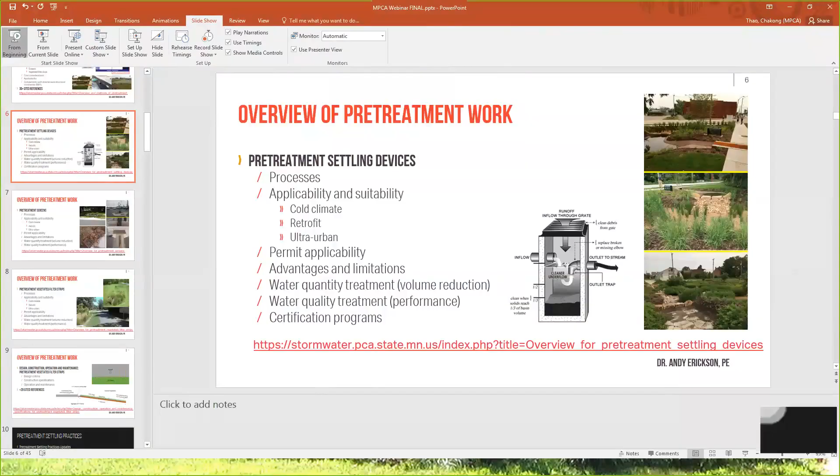Thanks for having us here, and thanks to everyone for attending our webinar today. I'm Katie Thompson, the project manager. I've been working on the pretreatment case studies and pretreatment sizing with Dr. Gulliver. We also have Dr. Scott Struck here from Geosyntec, who will be presenting on pretreatment selection practices and the BMP selection tool they developed. Dr. John Gulliver will be doing the pretreatment sizing, and Dr. Andy Erickson will be discussing filter strips and the Stormwater Manual update we've been working on prior to this most recent update. With that, I'll turn it over to Andy real quick.

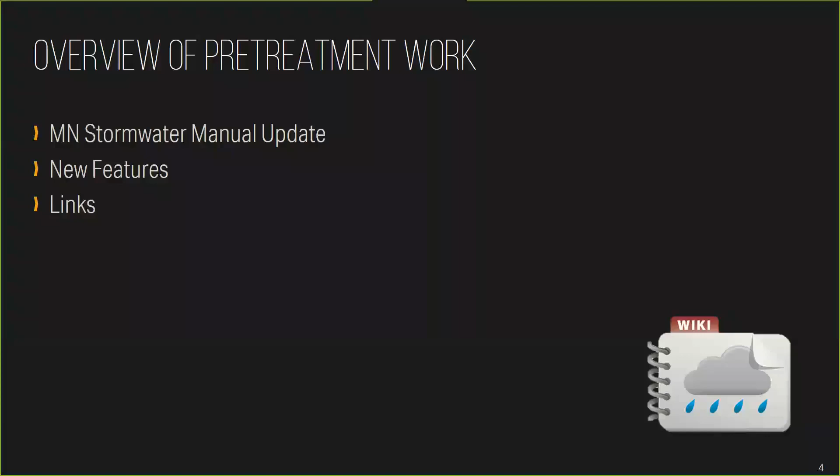Very good, good morning everyone. My name is Andy Erickson. I'm glad to be here with you today to talk about some of the work that we did previously on pretreatment.

Part of that work is we wanted to develop an overview of pretreatment, which covered not only the importance of pretreatment, but the different methods and practices, which fall into three categories: settling devices, screens, and vegetated filter strips. We developed information from over 30 references on cost considerations, applicability of these devices, and compatibility with downstream structural stormwater BMPs.

If we need more capture of sediment, we need to get into a structural stormwater BMP or even potentially advanced treatment.

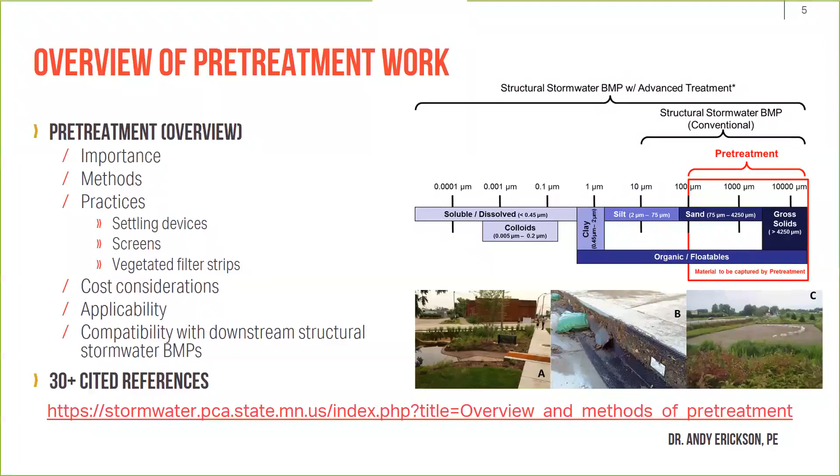We did go into some detail on the individual categories as part of that work. Settling devices, we really presented information on a lot of different categories: processes, what's happening in these practices, applicability and suitability in cold climates, retrofit conditions and ultra-urban situations. Also, there are links there to other parts of the manual related to permits and applicability.

We discussed advantages, limitations, water quantity treatment, which is really volume reduction. For these settling devices, typically we don't have volume reduction, but we do have water quality treatment in terms of performance for removing sediments and other pollutants. For settling devices specifically, we also have a section on certification programs, because there are certification programs and systems across the country, so we wanted to present that so people were aware and could look for those if interested.

Again, on the right side of all of these slides, I have some pictures and images from these individual sections. You'll also find at the end of each of these slides links to the individual pages on the Stormwater Manual where you can find all of this information. And these slides will be provided on the manual after this.

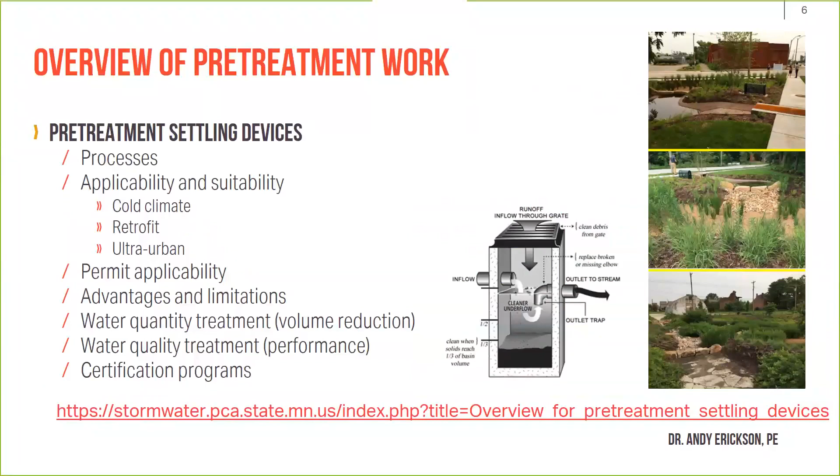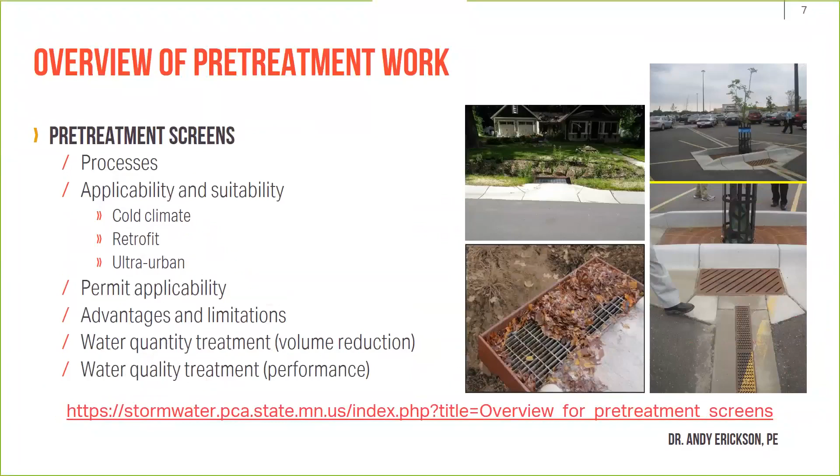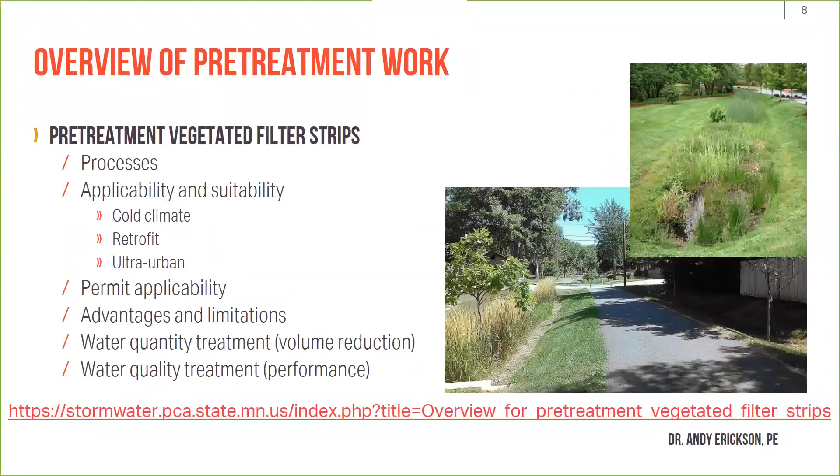And finally, vegetated filter strips with some images and a link here. Again, the same categories, although for vegetated filter strips as part of that work order, we did dive a bit deeper, and we pulled up some more references, over 20 more references to talk about specifically design, construction, operation and maintenance of these vegetated filter strips specifically for pretreatment.

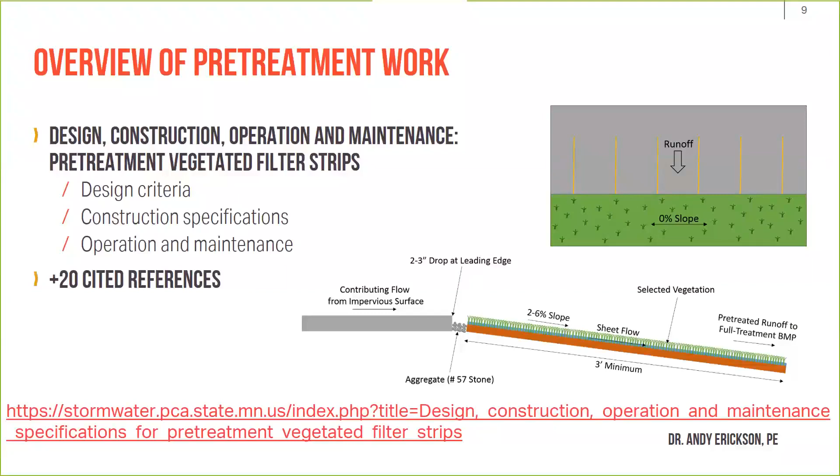All right, so this is Scott Struck with... did you, do you want it? Don't listen. Okay, this is Scott Struck with Geosyntec.

I'm going to follow up with Andy's discussion and talk about the pretreatment settling practices and the pretreatment selection tool, and then even do a quick demonstration of that.

As Forrest had mentioned, pretreatment is a requirement of the construction general permit, so it's covered under that permit and is a requirement of that. We're talking about a little bit more on the stormwater side, in that Forrest had mentioned how it was more of a descriptive type of standard that must be met, and I think that's good in that it allows some flexibility right now.

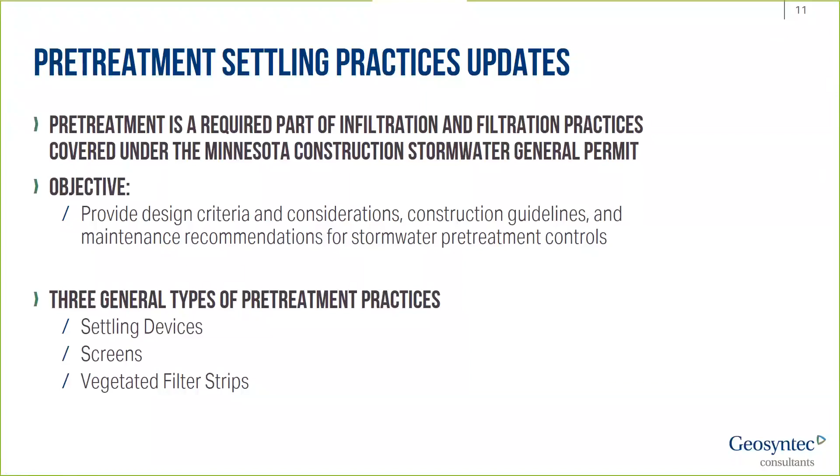But overall, as Mike had said before, our objective here is to provide some guidance. Andy just went over some of that information on the design criteria and considerations, construction guidance, and maintenance recommendations for these different pretreatment controls. Andy already hit on this, the three different types of general practices are settling devices, screens, and vegetated filter strips. We've taken that and gone into a bit more analysis of the functional processes of these.

We've ordered these in the pretreatment section under different processes, which include hydrodynamic separation devices or swirly devices as they're referred to, screening and straining devices, above ground and below ground storage and settling systems, filtration practices, and then a few that don't fit those typical descriptions, which we've put under other water quality devices, kind of a catch-all.

The organization of that part provides each of the different types of pretreatment practices in those categories, and each section provides a pretreatment overview, process summary, pollutant removal, system design and sizing information, installation recommendations, inspection, and operation and maintenance. That's all coming from the information Andy was describing in the manual, and we've brought that same information in for pretreatment.

The other side of that, mentioned a few times, is that a number of the devices are proprietary or manufactured, so we have numerous references back to those manufacturers' websites or some of the assessment websites Andy referred to, the national certification programs. There's a number of references that go back to that type of information, because it's very useful both in the siting and the design and expectations for performance.

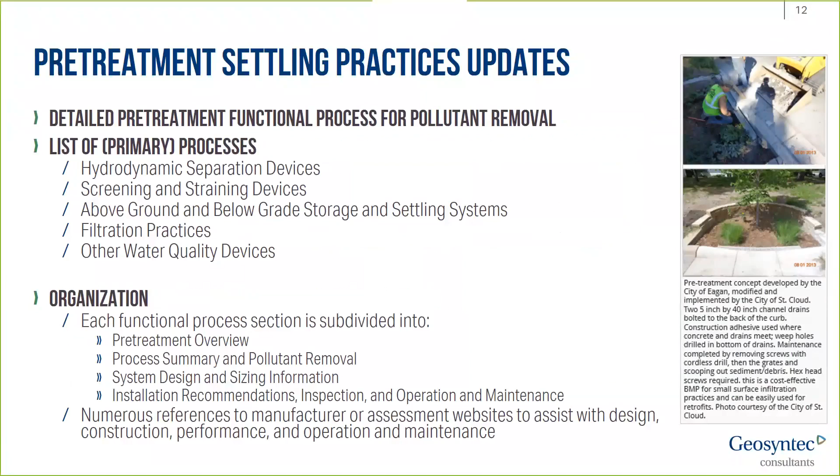This is a screenshot of what the pretreatment page looks like. This is a section from the hydrodynamic separation devices page. I pulled this one up mostly because it has some of the information already referenced, including reference to the link out to SHSAM, and the link to, for instance, the New Jersey Department of Environmental Protection, which provides one of the certification programs.

So you'll see there's a lot of this information directly hyperlinked within the text, so the information is really at your fingertips. I'm going to follow through the hydrodynamic separation devices as an example of the type of information, and then demonstrate that it's really there for all of these categories.

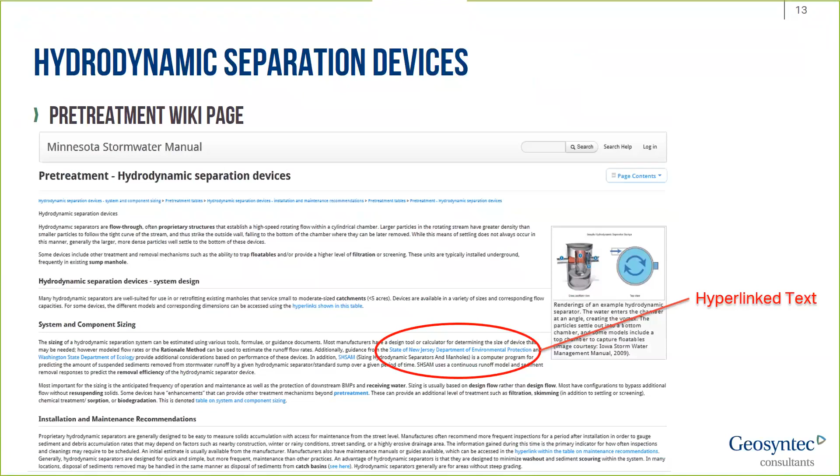Again, you see the quick information in terms of an introduction, system and component sizing, installation and maintenance recommendations, and then some O&M that connects to a number of different tables. This is an example of one of the tables it connects to.

This is specifically the information on just the description, the general descriptions of the different types of devices. This covers, for instance, the treatment mechanisms and general pollutants removed.

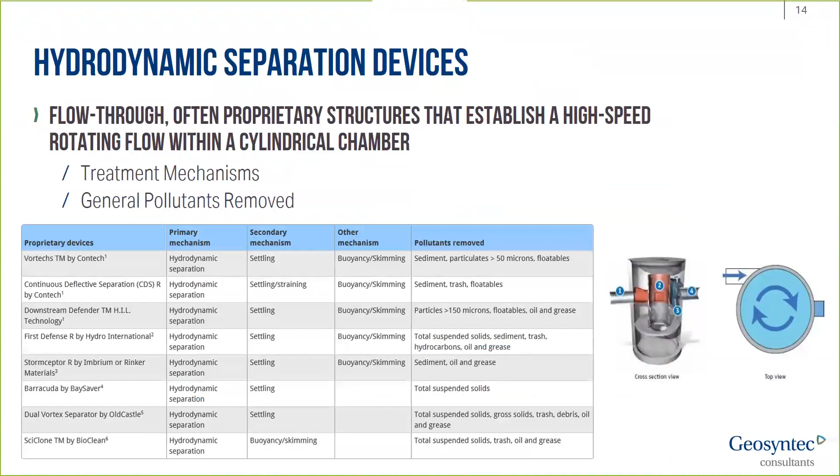The next section includes information on the system sizing and design information, and we've included information like the typical land use where it's applied, compatible downstream practice, some of the sizing calculations—especially on the hydrodynamic separators, this is where it often refers out to the manufacturer's sizing tables—as well as other aspects of the design that are important. For instance, inlets and outlets tend to be a real important factor on these, and whether they're designed or constructed properly, and then flow diversion structures.

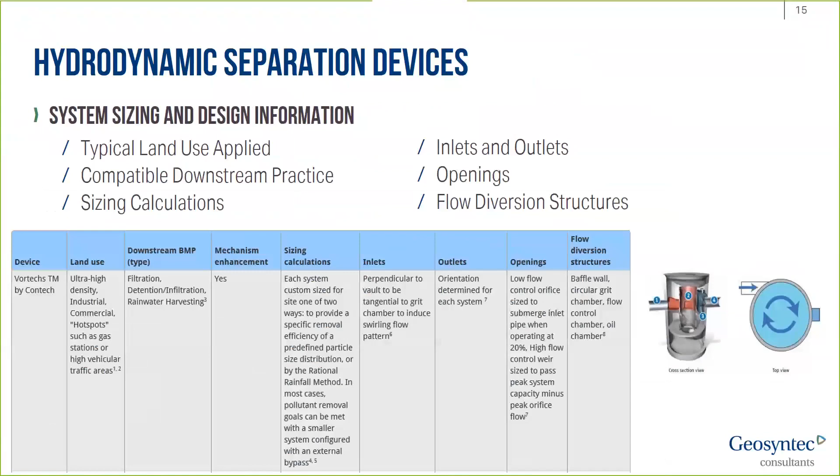Continuing on with the type of information in there: the installation recommendations, inspection, and operation and maintenance. We have a table that includes that type of information, including inspection frequency, the typical kind of maintenance that's needed, whether there's different public or private considerations, and then ways that you can potentially minimize some of the maintenance, and some cost considerations as well.

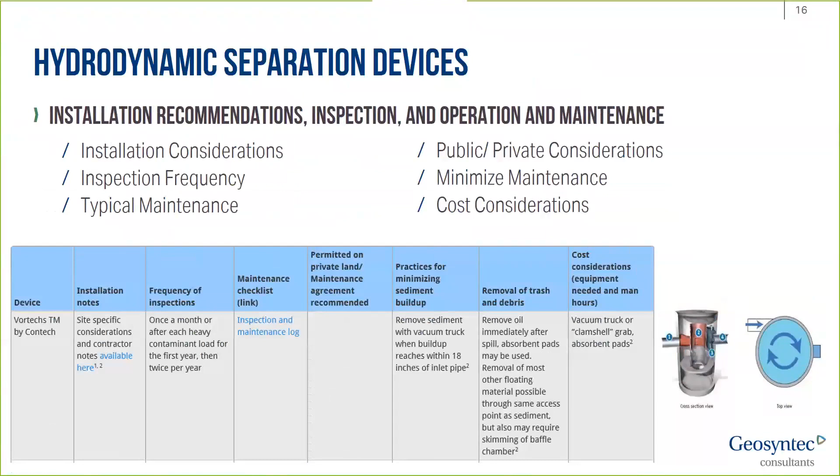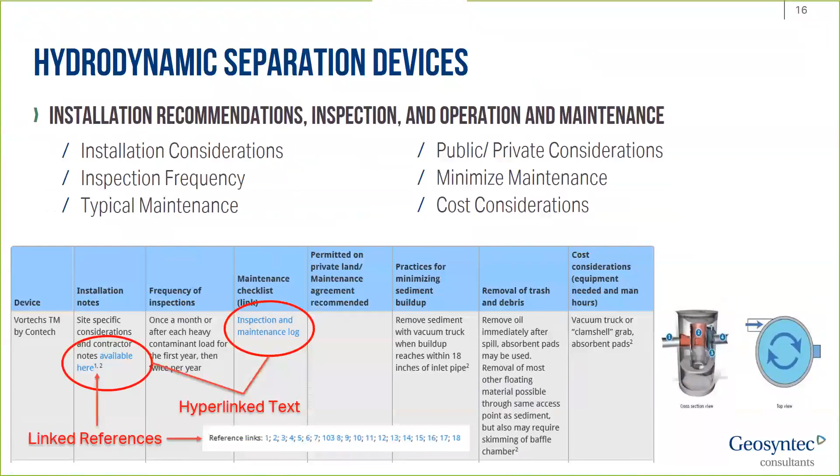You'll notice from this screenshot of that table that we have hyperlink text that goes out to manufacturers' recommendations. In addition, as Andy was indicating, there's a lot of citations for a lot of the information in there, and we've included a lot of linked references that are also hyperlinked and accessible to everyone using the tool.

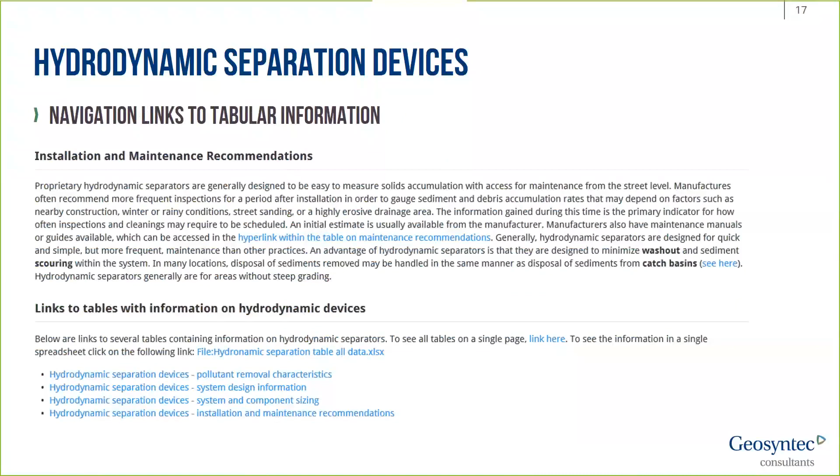With that, we have these numerous tables that help sort out and think about how these practices work and the way you might select or decide between each of these. So with this, we have links to numerous tables. I think Mike was really thinking ahead on this when he decided we should have a single page with all of the information on there.

So we have this link to all these tables, as I was just showing. We have a link that has all of those on a single page, for instance, where you can look at the comparative parts of each of those factors. And we have an Excel sheet that you can access it in as well.

And then lastly, we have individual tables themselves, such as tables on summary and pollutant removal characteristics, design information, sizing information, and installation maintenance recommendations. It's packaged in multiple ways so that you can look at different aspects of each of these pretreatment practices and get an understanding, or even hone in on the aspect you're most interested in without seeing additional information if you don't want to.

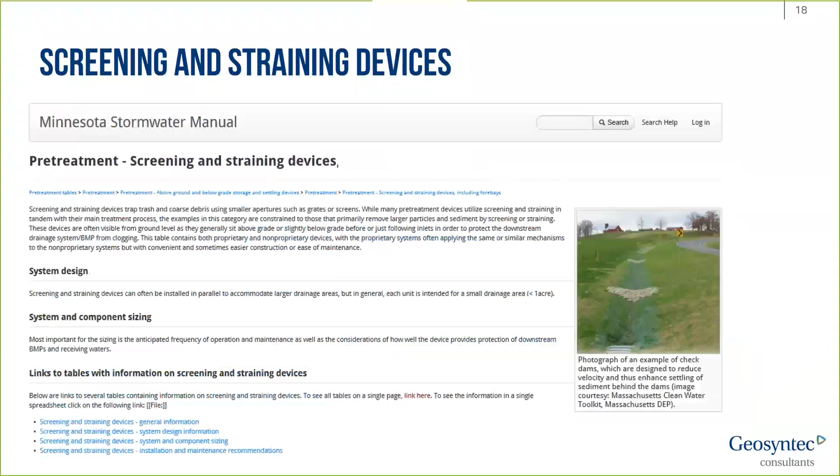So this is just an example of the screenshot for the screening and straining devices, as we've called them, and then the above and below ground storage and settling, and filtration devices and practices. As I mentioned, we had a catch-all, the other pretreatment water quality devices, which included things like floatable booms, snouts, hoods, and so forth.

We go through and you can see on this page we indicate whether there's a proprietary or non-proprietary type of device out there, so that if you are looking for a manufacturer, you can know whether it might be available. And if there is something that you desire that's not from a manufacturer, you can consider something like that.

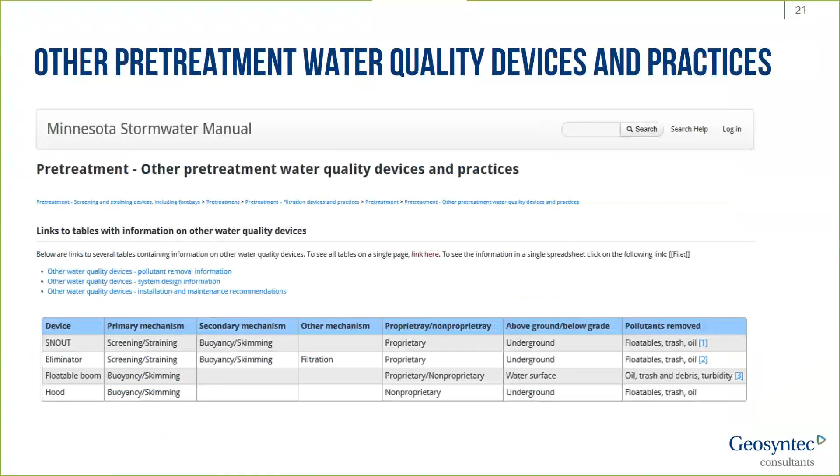And so we've gone through with the team and decided on essentially four major factors that are probably the most common type of factors where the user might want to determine which practices meet those different characteristics. We've sorted those out by general pollutant type, the downstream BMP protected—so that compatibility of downstream or primary BMP systems—the approximate drainage area, and space requirements is the last one.

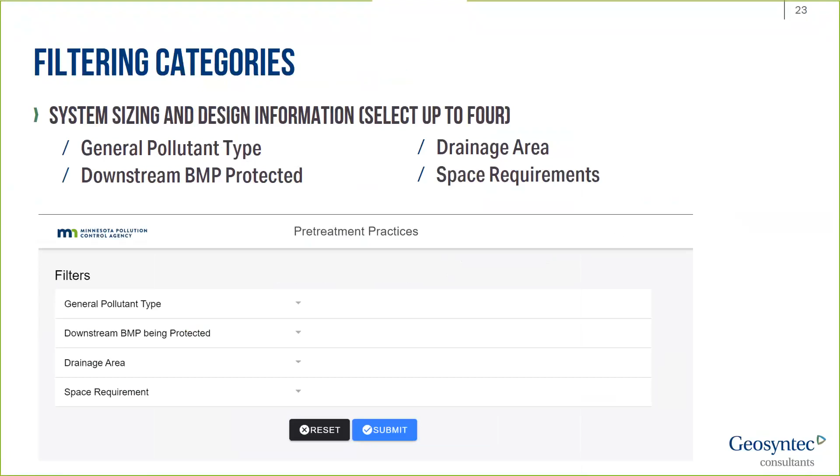So to give you an example of how this works, here's the general pollutant type. If you click anywhere on that bar, this little menu pops up, and you can see that we've put these in general categories. One of the more challenging parts of developing the tool is we wanted it to be sortable, but we wanted to put it in general categories that were somewhat defined, but weren't completely defined.

Many of these practices will capture multiple different pollutant types, so we've just put them into categories: mineral and organic solids, floatables, and oil and grease as a third category. You'll notice that the top one, where the blue button is right now, is blank, and the reason for that is that if you go back and select the blank one, it doesn't filter anything on that particular factor. So that allows the flexibility to choose any of these four that you see in the grayed area here.

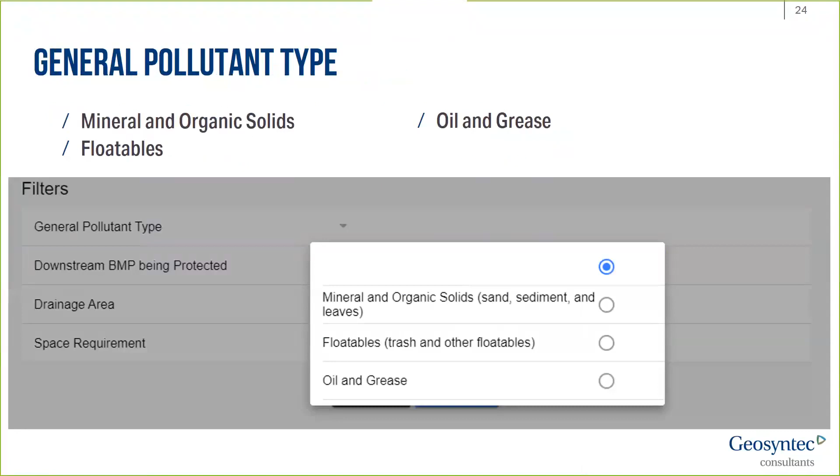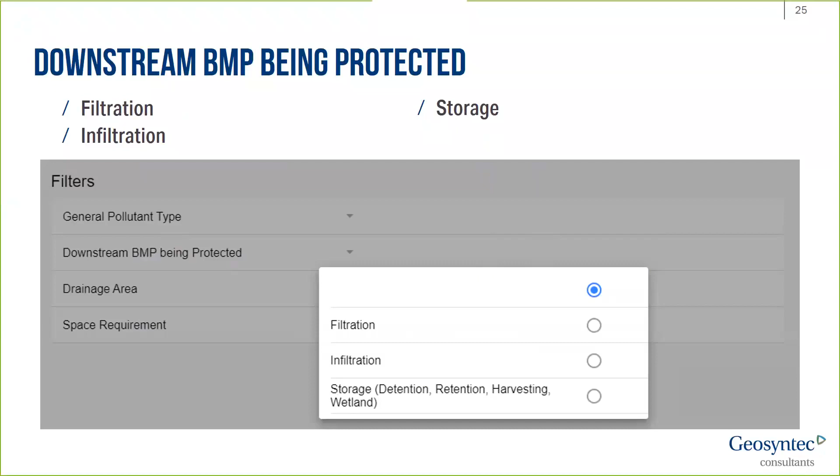So following on that, the downstream BMP being protected—we again categorized that. We could have had a list of 20 different downstream BMPs, but instead we worked on it from the types of processes being used: filtration, infiltration, and storage. We included a few examples, like detention, retention, and rainwater harvesting, and wetlands, for instance, for the storage kind of devices.

The next one is drainage area, and again we've categorized it into general terms: large, medium, small, extra small. But in the drop-downs, you'll see that we've actually defined that. Large means, for instance, a drainage area of greater than 10 acres.

We've also done some rudimentary modeling to make sure that drainage area roughly relates to a flow rate, because oftentimes these devices, especially hydrodynamic separators, are sized more often from flow rates rather than drainage areas. So we've included things like greater than 15 CFS for that large category, as an example.

Again, these are not hard and fast categories. They're more generalized categories for use, and you can select or deselect these and compare the different results when using the tool.

The last one is space requirements. I mentioned above ground and below ground, so we have above ground large, above ground small, and then underground large and underground small.

We had to come up with some kind of size limitation for what large and small meant. We looked at a number of practices, and again this is one of those gray areas, because some practices have multiple sizes, so these aren't hard and fast definitions, but more gray definitions that give you a way to at least sort into something that reduces the number of potential pretreatment practices.

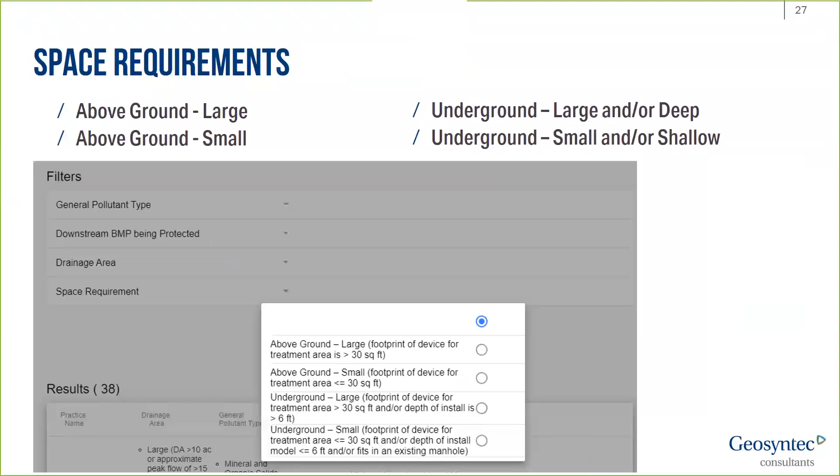We found that roughly 30 square feet is about right. Mike might say we need to change that in the future to something smaller or larger, but this seemed to be, at least as a rule of thumb, a good size to start with.

Other information included in the results, of course, includes the ones we sorted on: drainage area, general pollutant type, downstream BMP, and space requirements. But we've also included a category for ease of maintenance, which is one we were originally thinking about sorting upon.

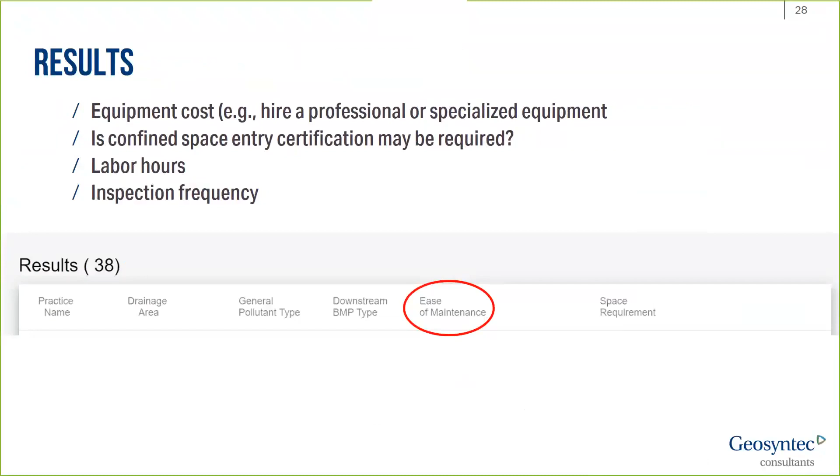We decided not to, because it made it a little more challenging in terms of how to define those. But it was important to maintain some of that understanding and reporting of ease of maintenance, and so we've done that. Here's what that results looks like.

This is just going through an example, which I can run through once I jump into the tool. I selected the general pollutant type, and then I selected mineral organic solids that I'm targeting, and then the downstream BMP being protected.

For that compatibility, I've shown an infiltration BMP, so maybe I'm thinking about putting a bioretention system that allows infiltration downstream from that. I've selected a drainage area, and then those space requirements.

Let's say I'm in a more urban area, or I'm along a street corridor, so I'm within the right-of-way, and I want a small above-ground footprint. So I've used those as my factors to sort that.

You'll notice in the results, if you've been paying attention on previous pages, when unfiltered there are 38 practices total. But when I've done this sort with these filters in there, I'm now down to 12.

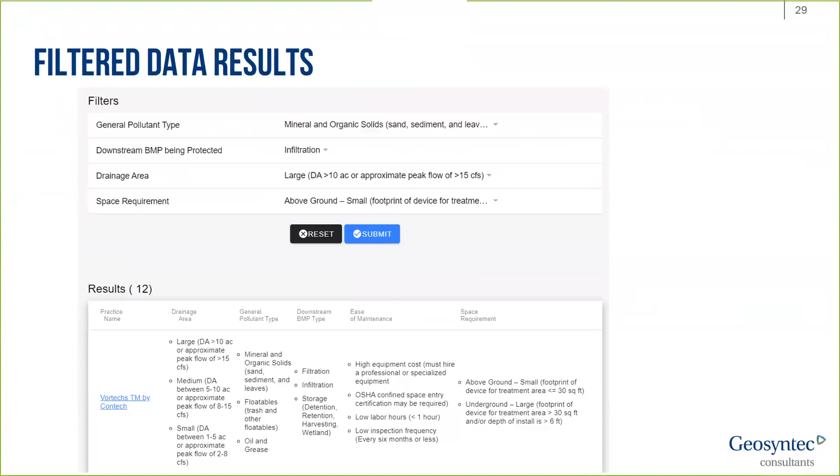Just to give an example with this one particular system, the Vortechs device, if I click on that, it takes me to a page where I can look at all the devices in that category. Now I have the Vortechs in particular, where I can look at each of the factors we talked about before: general information, system design information, component sizing, and, not shown on this page, operation, maintenance and construction considerations.

You'll notice this is what I was referring to, the table that's very tiny. I don't expect anybody to see this, but at the very bottom it has references and footnotes.

So this is my last example for screenshots. I figure we'll give it a go and trial it out. Mike, what do you think? Might as well try. All right, let's test it out.

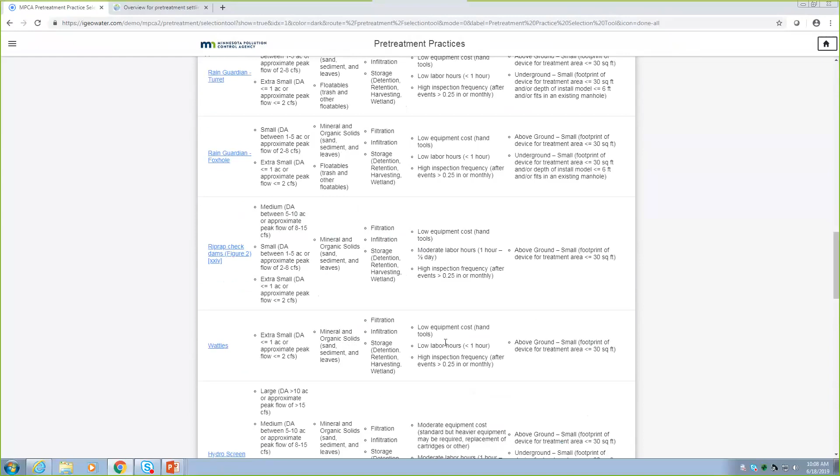And as you can see, if I scroll down, here are all of those results. You can sort it on the number of pages or number that show up to 20. So again, just like your Amazon page and so forth that we go and buy things at, it has a similar type of filtration.

Instead of shoes, we're going for pretreatment devices, and we're doing the same thing. Instead of size 9, I'm looking at general pollutant types and so forth. So it's set up very similar to that, so you can focus in on the types of practices that you would like to put in.

So, for instance, I can go to small drainage area and submit that. You can just see how that's changing. Space requirements, I can go to an underground small footprint and submit, and you can see how the practices are being sorted, the kind of information that's produced.

And then again, if I click on these links, it will go back to the website and bring you to where that section is within the pretreatment website, and you'll have all of the other previous references and so forth there. So with that, I think I'll stop. I'll give it back to Katie.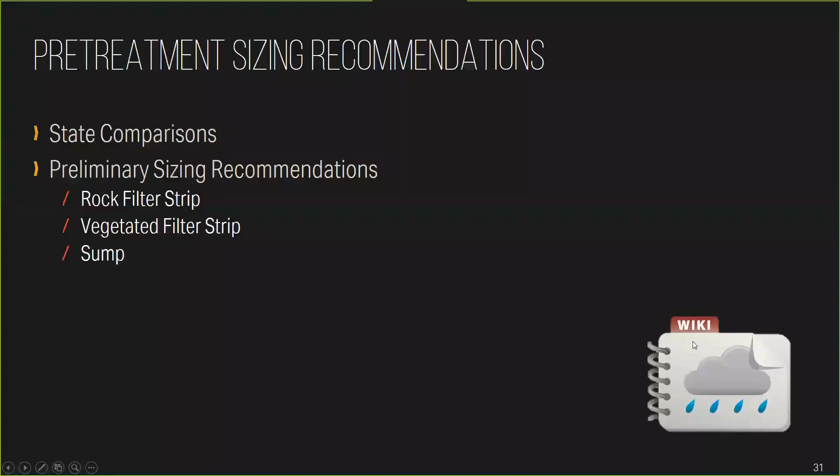Alright, so we started talking a little bit about sizing of these pretreatment practices, and I'll speak briefly about some of the background on pretreatment across the country, and then John will get into the details of the sizing recommendations he's working up right now.

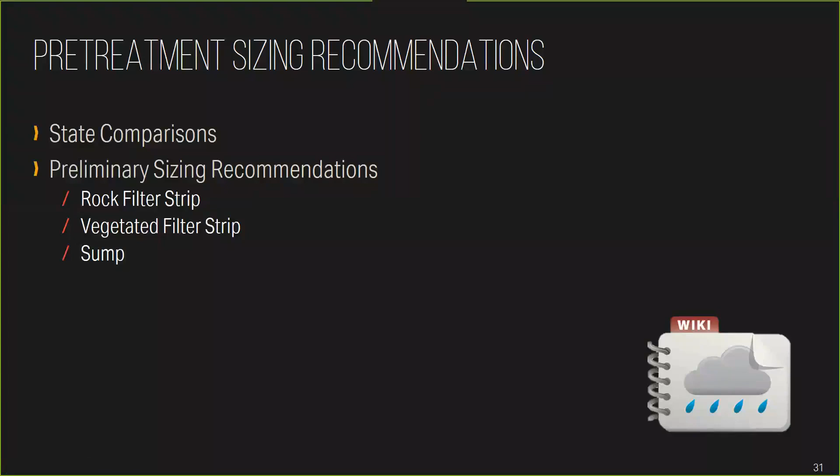So regarding pretreatment around the country, as part of this work order we reviewed all 50 states' stormwater permits and a few territories to see what was out there. We looked at stormwater manuals if they existed - a lot of the larger, less densely populated states really rely on their Department of Transportation to provide the stormwater or hydraulic design criteria. Of the 50 states and 3 territories we looked at, 47 had some sort of stormwater manual. 24 of those had some kind of detailed design criteria for pretreatment, meaning at least one requirement - a depth for a forebay, some calculation for volume, something to that effect. The rest either referenced other states or had general design recommendations like 'you shall provide pretreatment.' Within what we found, there was just a lot of variation in the standards too.

Here's just a few pictures of some of the stormwater manuals that we dug up. The Minnesota Stormwater Manual's wiki page actually has a table with some of these already on the page, so there's a link to that too.

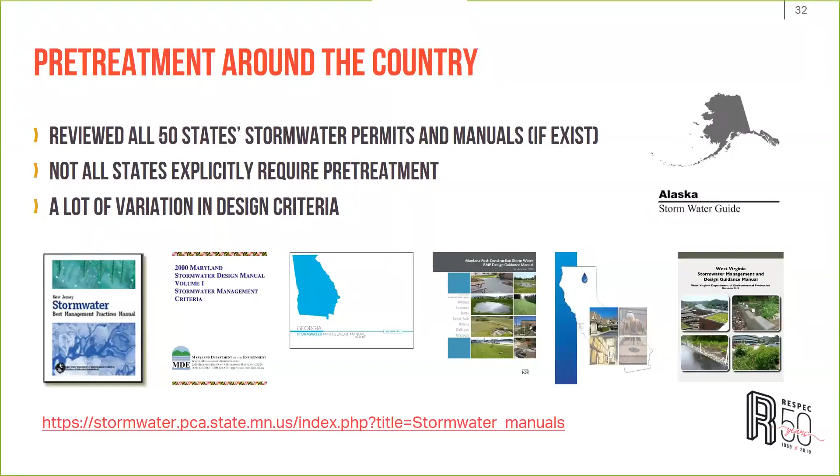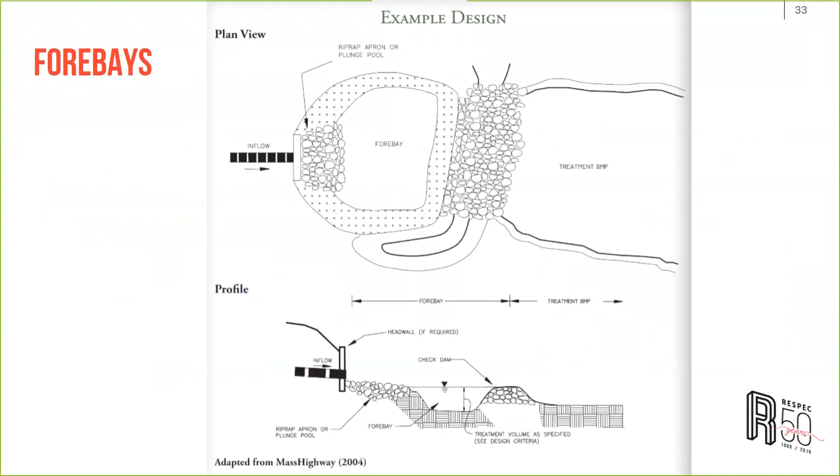Just to show the variation in sizing requirements and recommendations, we looked at a forebay as an example. This is a generic picture of a forebay design from the Massachusetts Stormwater Manual. We look at forebays because they're commonly used to provide pretreatment, and most people are familiar with them. There's a forebay here on the left, providing pretreatment for a generic structural BMP downstream, separated by a check dam, berm, or rock weir.

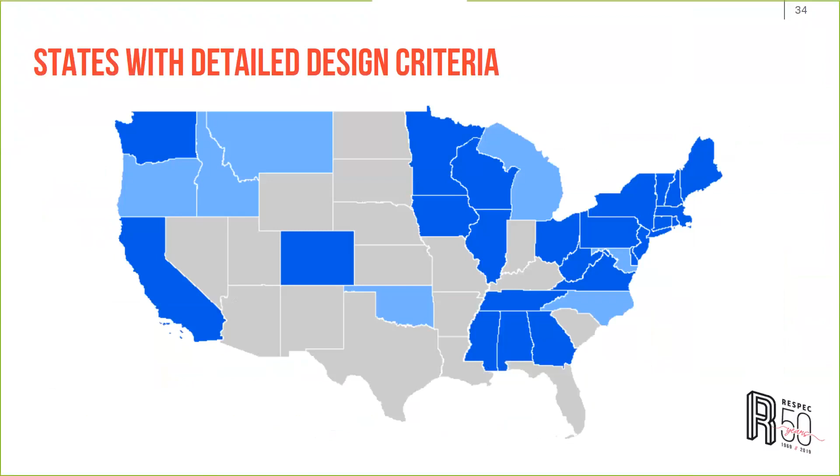For the forebays, the dark blue states had some kind of detailed design criteria, at least one requirement—had to be 4 feet deep, had to have a certain volume or specific surface area. The light blue states had just a general design requirement saying you should use a forebay. The gray states either didn't have anything or didn't specify anything on a statewide level.

That doesn't mean something doesn't exist, it just means pretreatment for forebay was not explicitly required—most likely it's required through an MS4 or some other local entity. So what we found was there was a pretty good range of how you would calculate the size of a forebay. The most common one we found was 0.1 inch of runoff from the impervious drainage area contributing to the BMP itself.

Actually, 0.1 inch, excuse me. There was also a percentage of the water quality volume going from 1 to 10%, or a percentage of the total runoff volume going to the BMP itself, between 1 and 40%. That really depended on what type of downstream structural BMP you had. If you had an infiltration device or trench, particularly if underground, most states would require a higher percentage of that volume, so a larger forebay.

Maine had an interesting one—a pretty detailed equation to determine how much sand was actually going to enter your forebay from the drainage area. The Minnesota Stormwater Manual currently recommends 10% of the water quality volume, so 10% of 1 inch of runoff, and that it be between 4 and 6 feet deep.

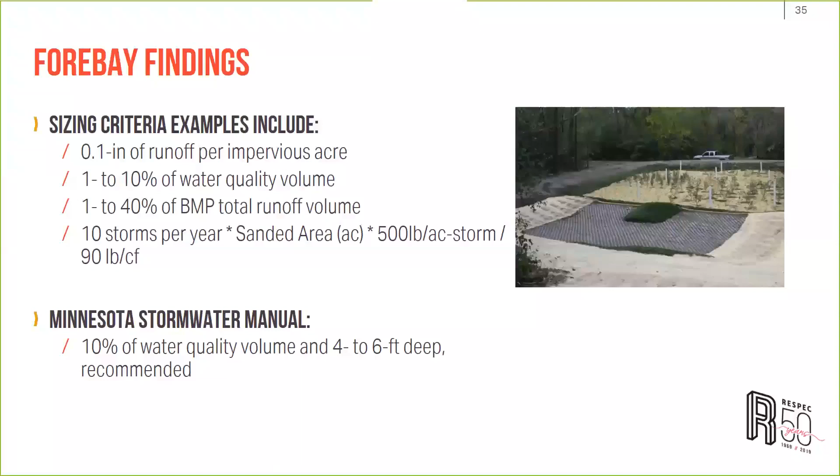So I'll turn it over to John here to explain why sizing is important and what we're really working on.

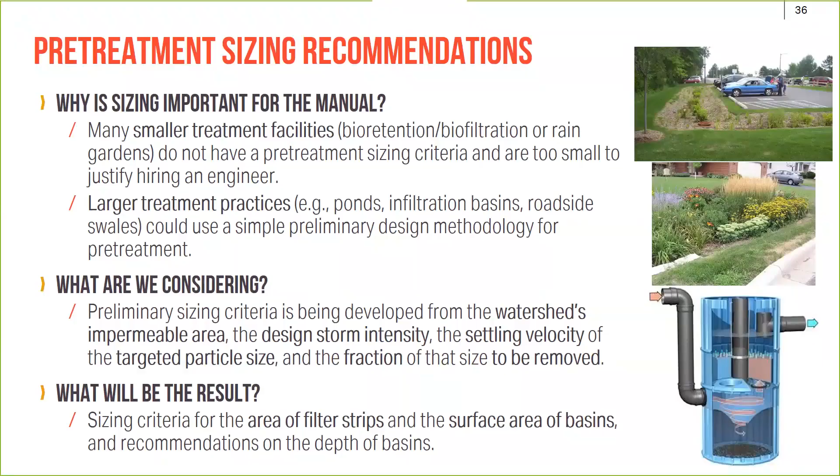And then with that, we'll wrap up our webinar by looking at a few pre-treatment case studies we developed with some project sponsors. We won't go through all of them, there's links to them at the end of the presentation to the Stormwater Manual itself, but we'll highlight the vegetative filter strip, rock filter strip, and forebay examples that were submitted.

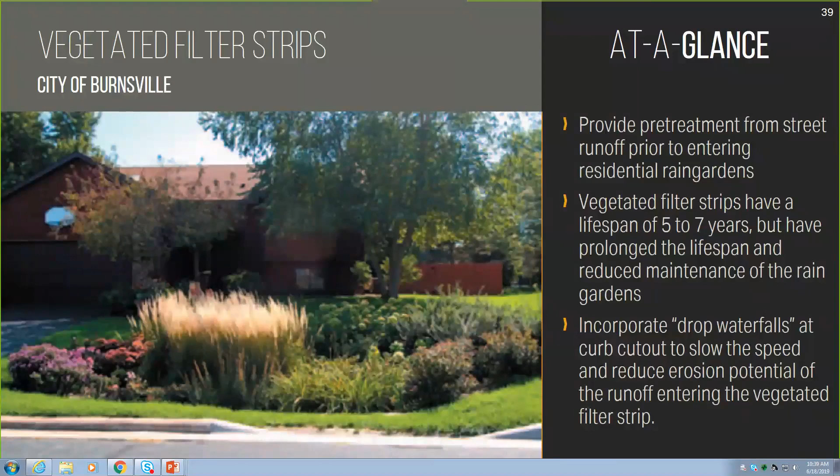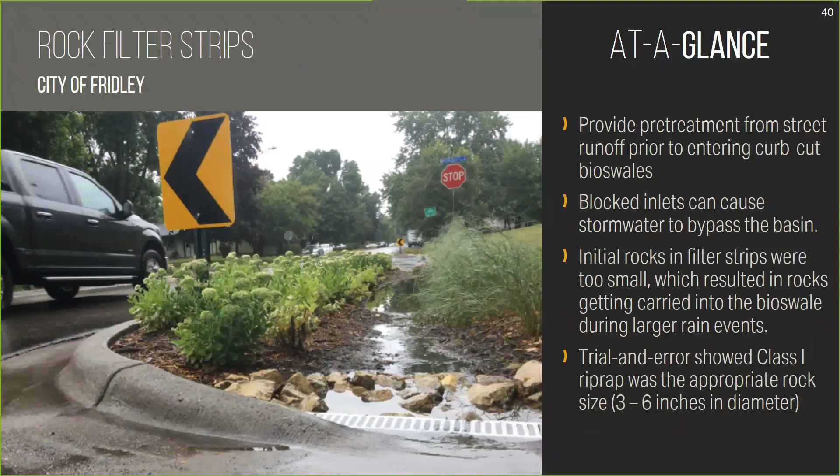Some of the lessons learned from the city was that the placement of the rocks really matters, and blocked inlets were causing stormwater to bypass the basins themselves. Also, the size of the rocks, if they're too small, results in the rocks being carried away during large storm events. So through trial and error, they determined that Class 1 riprap was the appropriate rock size for this specific bioswale, given the slopes and flows entering these BMPs.

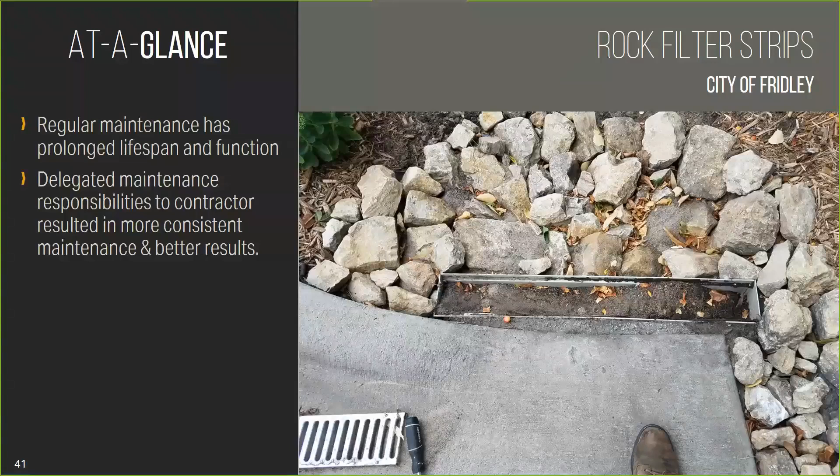Some of the other lessons learned that they recommended was that regular maintenance is key to the longevity of any BMP, and that really prolongs the lifespan of these treatment practices. They delegated the maintenance responsibilities, adding 3 years of maintenance responsibility to the contractor to ensure maintenance was conducted correctly and when needed. They found that provided more consistent and better results than a resident-driven maintenance program.

It's really hard to put out a laser pointer.

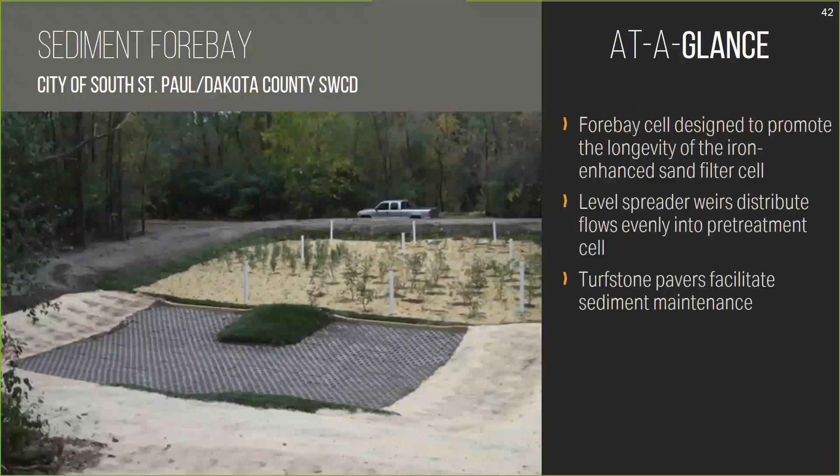One of the unique features of the sediment forebay is that they include Turfstone pavers to facilitate sediment maintenance. Having a hard bottom at the bottom of your forebay really makes it easier for your contractor to go in and scoop out accumulated sediments, especially if they can't see the bottom. They also have level spreaders to distribute the flows evenly into the iron-enhanced sand filter.

Checking my notes here. Also, vacuum the Turfstone to remove the fine sediment that accumulates at the paver surface level after you remove the majority of the accumulated sediments.

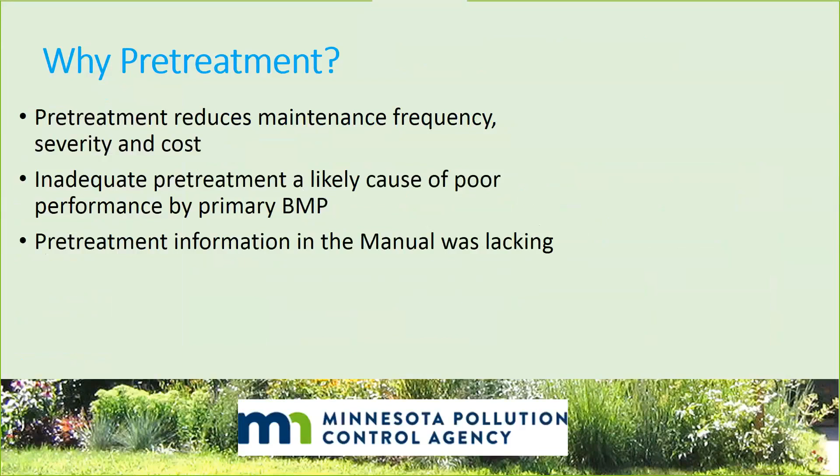I think this one might be for you as well, Dr. Streck. Where is the link for the pre-treatment tool? That's a great question. We have not included it yet because we have some final cleanup and testing to do internally with the team, including nomenclature that we're using within it. It will be provided by the end of the month, for sure. And if I understand correctly, we'll also have the ability to continue updating it beyond that, so that as more practices come online, we'll be able to continue to build on that tool. That's right. In terms of maintenance of the tool itself, we're giving that over to Mike and MPCA so that they have control over it and can maintain it themselves in the future.

I don't know if there are any other questions. We're going to unfortunately have to defer those, but we will try to get to all the questions in a posting that we'll have in the manual. I didn't go through the pre-treatment stuff, but there were some great screenshots to show you what is in the manual right now. If you're in the manual, just type pre-treatment in the search box and it'll be the site that pops up.

A note, and it's been mentioned a couple times, that this current work order ends July 1, so things are still in flux. We're still adding things to the manual. The selection tool is still being worked on. The sizing information is still being worked on. So we still have some work to do, keep that in mind.

But at the bottom of pages in the manual, there is a comment box. If you have comments, please send them to us. I do read those first thing Monday morning. I can't wait all weekend, I just wait to get in and take a look at the comment box. So I'm always disappointed when there's nothing there.